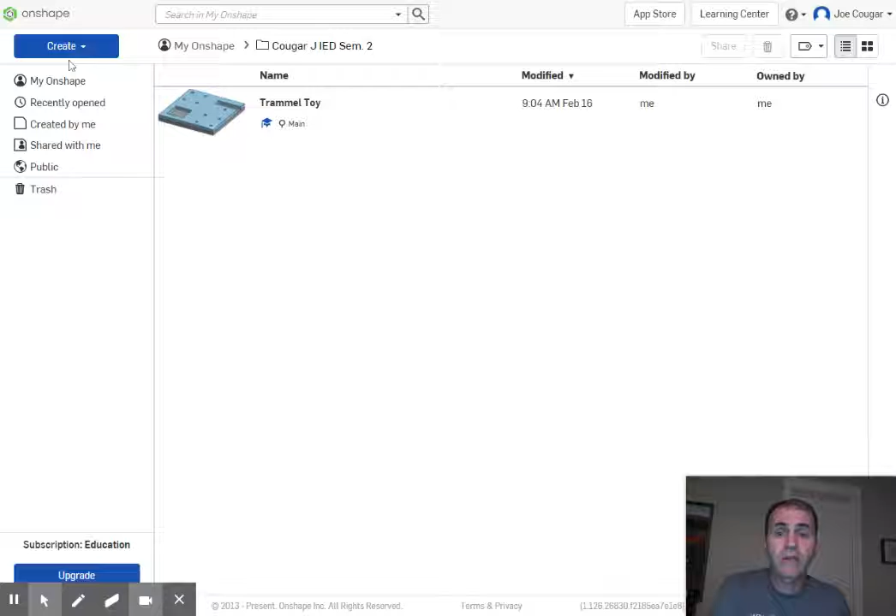Now you have your Trammel toy, and we're going to create a new document. We'll call this one Automata, A-U-T-O-M-A-T-A. Okay, so we've got a new document going in there.

Now here's the good news: most of this stuff is going to be pretty easy to build. It'll get a little different in the assembly, so we're going to build all of the part pieces for the box in one part studio.

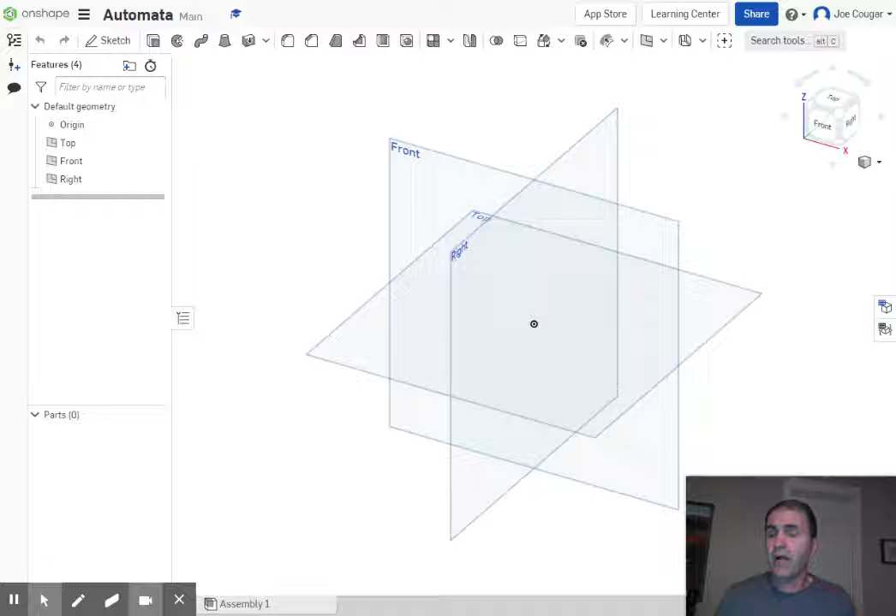So here we go. Let's go ahead and sketch on the top view. Doesn't really matter this time. I'm going to hit P to turn off planes, N to view normal, and we're going to make several rectangles that are going to be the pieces of this box.

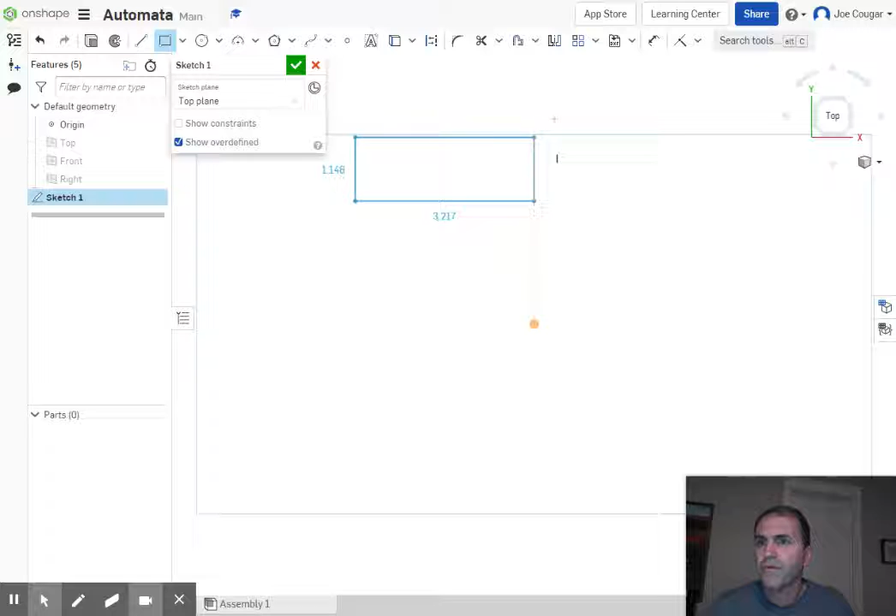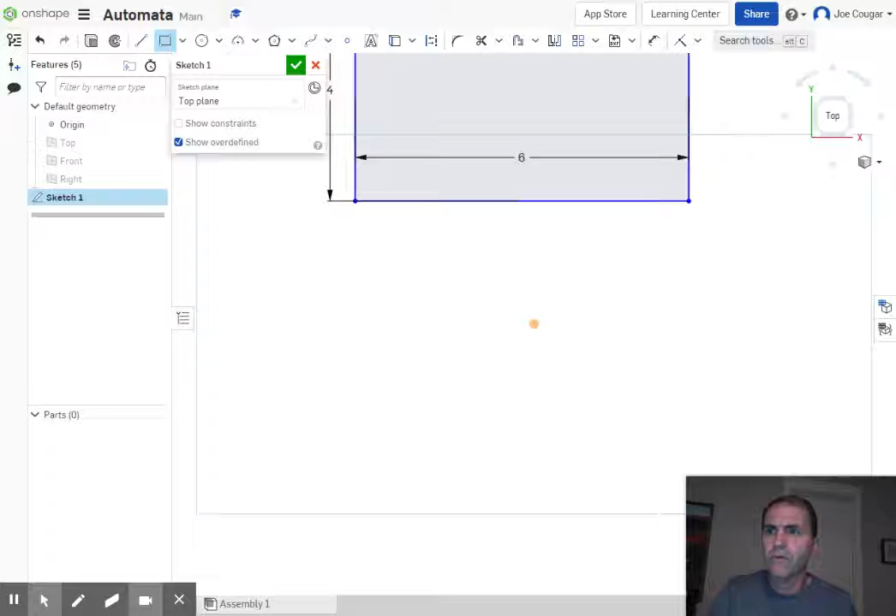So let's start with over here. You're just going to make them in random places. The first one is going to be 6 inches long and 4 inches tall. Okay, so a 6 by 4. That's going to be the back.

Now let's make another one nearby that is going to be 6 by 4.2. Because the thickness of this material is about 0.2, so I hope this will come clear in a little bit.

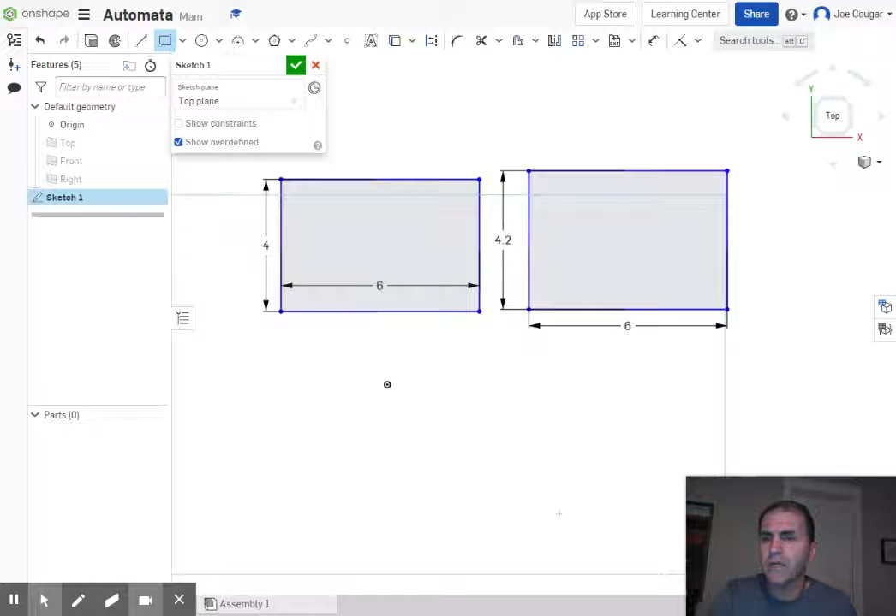We're going to make yet another one that is 6 and 4.2. One will be the top, one will be the bottom. And we're going to make one more random that is 4 by 4.

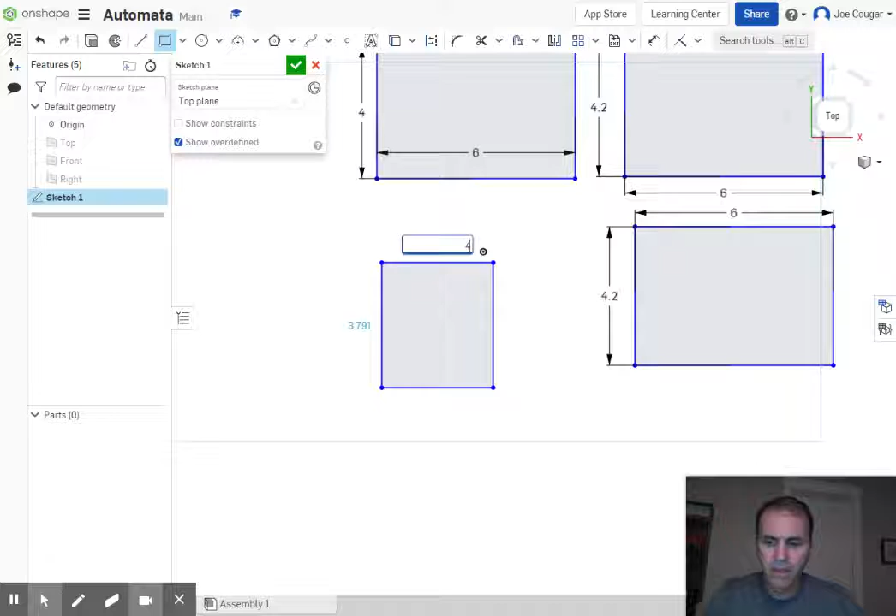All right, now in one of these, we're going to put a hole right here in the middle of this one. So hover over until you find some midpoints.

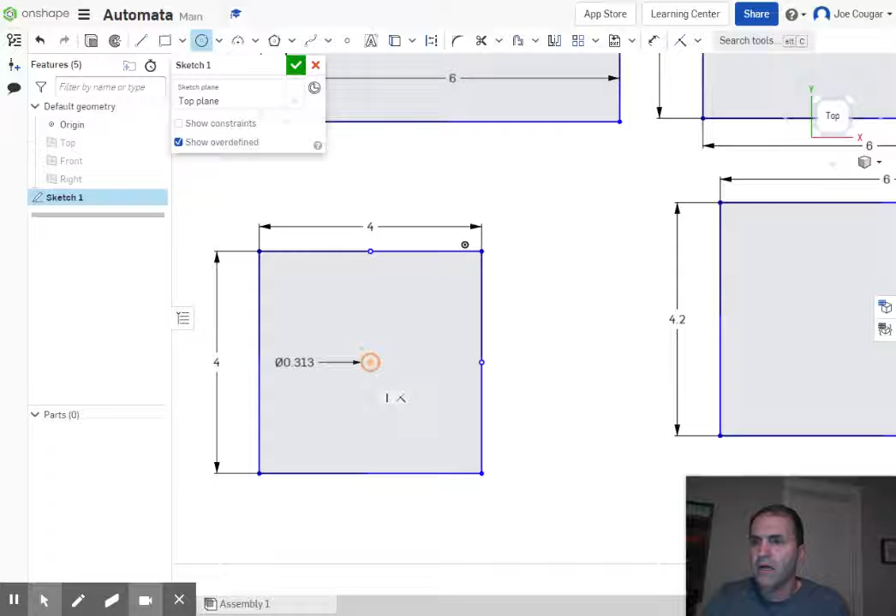Okay, and then we're going to click circle. We're going to hover around until we get right in the middle. See those two lines? Click, pull outward, and we're lined up. Click again, and we put in 5/16, 5 divided by 16, as the size of the hole. So there is our hole in the middle, which is now lined up in the middle.

So that's good, that's the sides. Now the top is going to need some 1/4 inch holes. We're going to line that up with the middle and come in about an inch or so. Click and pull, and we're going to make that also—no, I'm sorry, 1/4, 0.25.

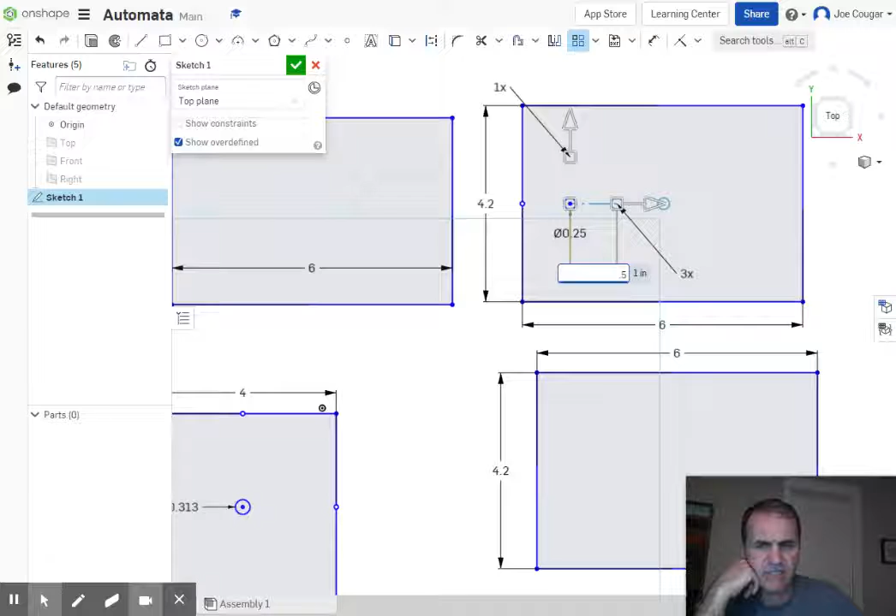And now we need to make a pattern out of that. I'm going to hit escape to get out of the command. I want to go up here to linear pattern, click on that circle, and right now the distance is 1. Let's try changing that to 0.5 and see what happens, and I need to have 6 total of them. Right now there's 3, I want 6. I have to double click on that, I want 6.

Okay, now it could have been bigger than 0.5, so let's go back and change that. Let's try 0.75, see how that looks. That's looking pretty good. Let's try just 0.8.

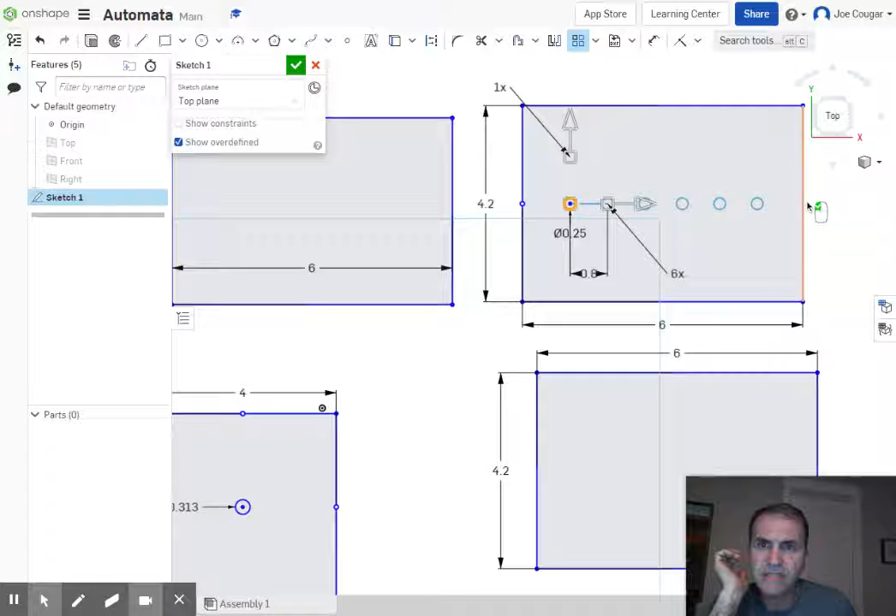I like that a little bit better. Okay, so it doesn't matter exactly where you started as long as we're about the same distance in from each side, and we have 6 total holes. And then we'll say, okay. Oops, I finished the sketch.

That's fine. Actually, no, it's not fine. Sorry, I want to go back into that. I'm going to double click sketch 1. I have one more thing that I want to make.

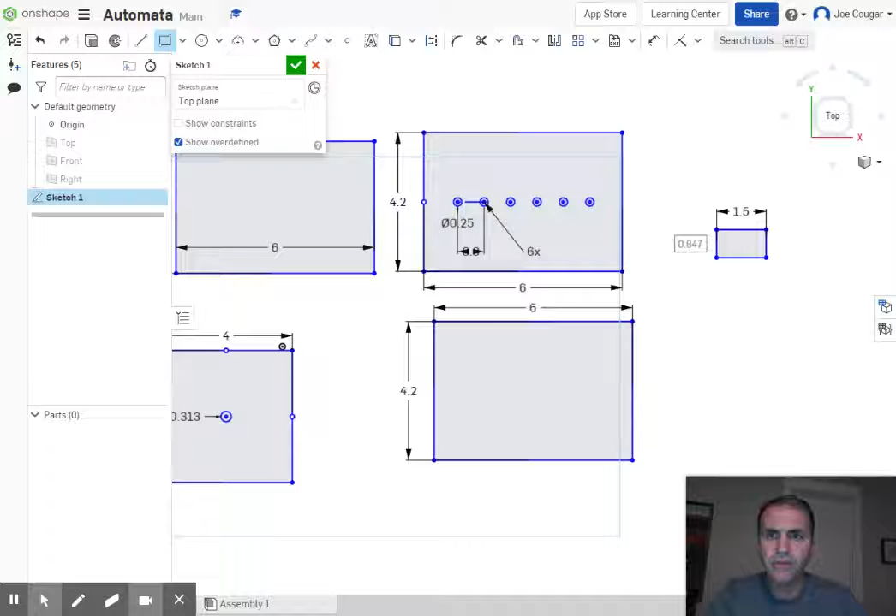And over here, we're going to make another rectangle here that is 1.5 inches long, 1.5, and 3/4 of an inch thick, 0.75.

All right, now this is going to have some holes in it also. This time I'm going to line up, and we're going to make a 5/16 inch hole over here. Whoops, I'm trying to make a rectangle. Let's try that again with a circle.

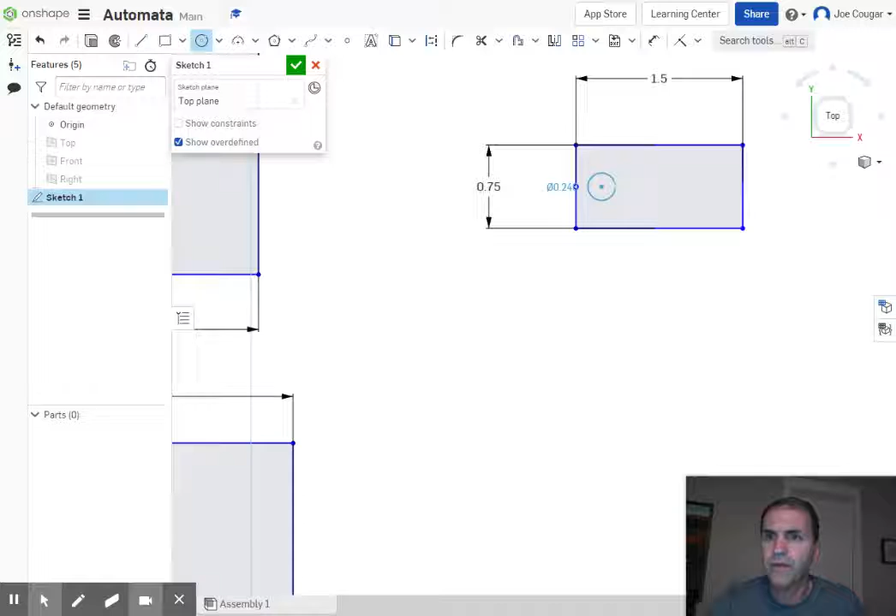Whoops, I accidentally clicked on there. Let's try that again, I meant to line up. Hovered over the center point, click 5/16, 5 divided by 16. And we're going to do another one lined up with the other side over here, also 5 divided by 16.

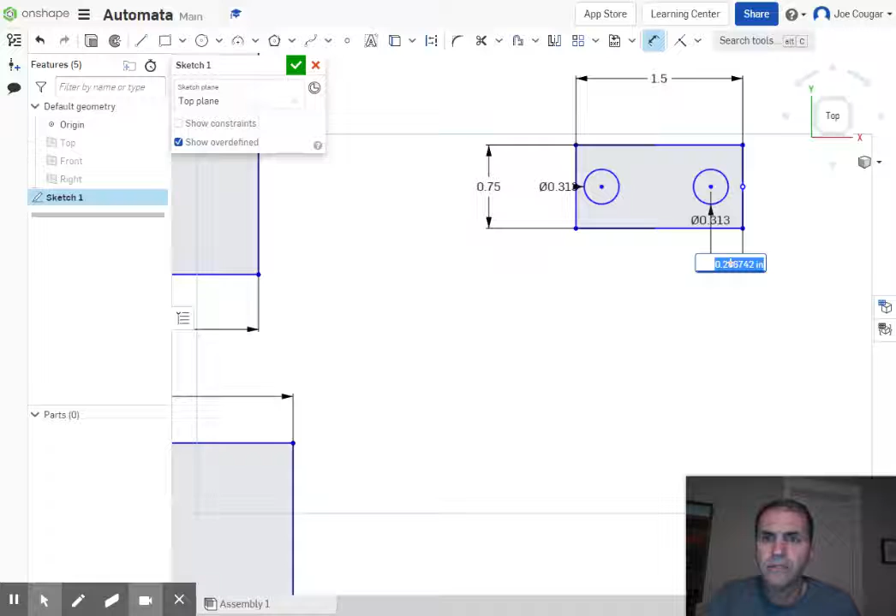And these two are going to be located using the dimension tool, a 1/4 inch from each end. So 0.25 from that end, and this one will be 0.25 from the other end.

Okay, good. Now I thought those should turn black because I lined them up. Oh, this whole thing can be anywhere though. So okay, we're all good.

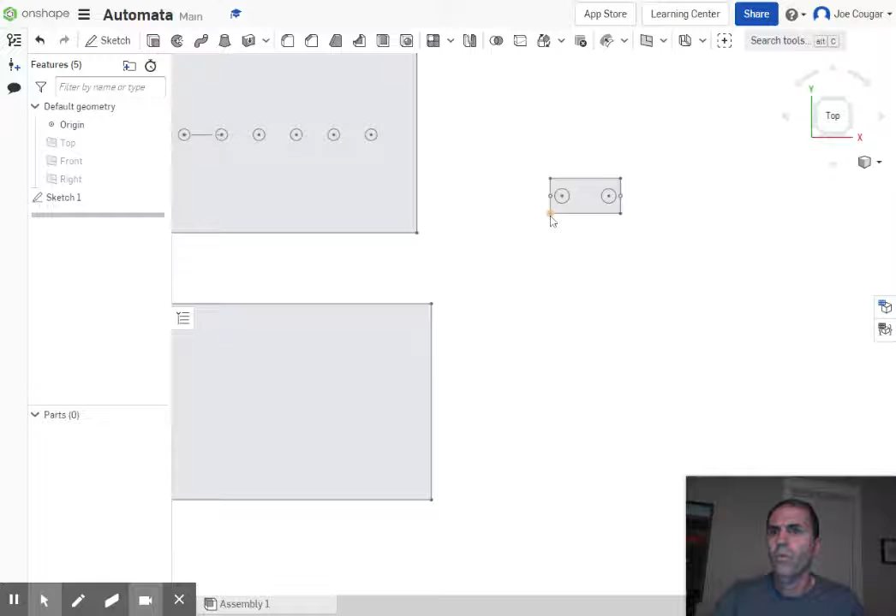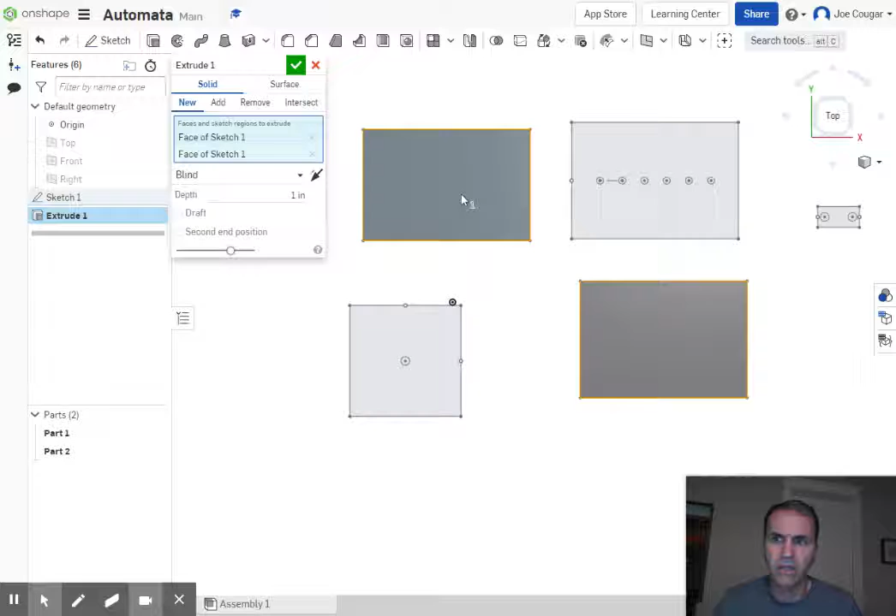Now we're going to use this sketch and do a whole bunch of different things. Extrusion number 1 is going to be the bottom. I guess this is the bottom because it's the 2 blank longer rectangles we're going to click, and the inside of this side, not including the hole, because we're going to leave that circle as a hole.

Now it's making 3 different parts, and that's okay. All right, but we're only going to go to a thickness of 0.2, which is about the actual thickness of the plywood. All right, now the sketch went away, and that's okay.

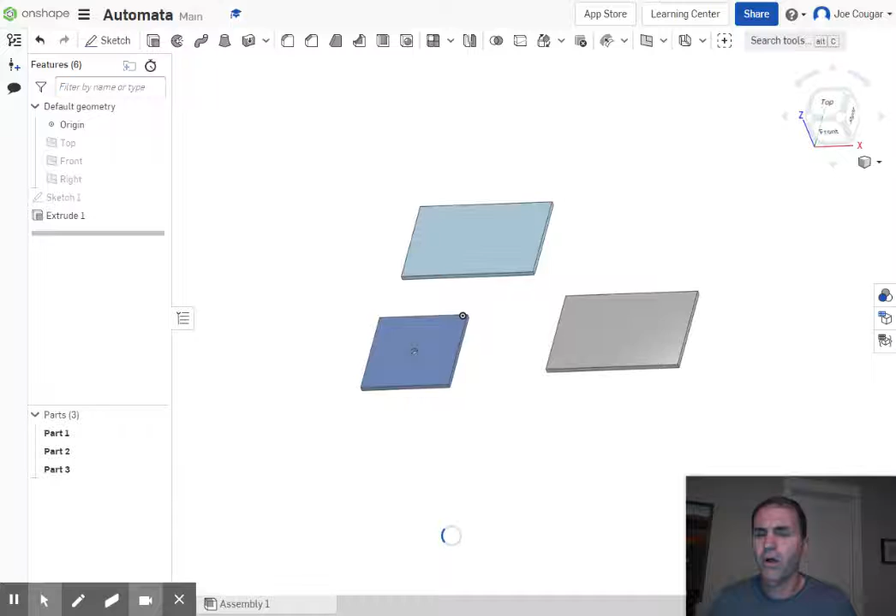Let's hover over here and see what's what. Okay, now I need to remember which is which here. So part 3, the one that's square, we're going to rename - right click, rename - call that side.

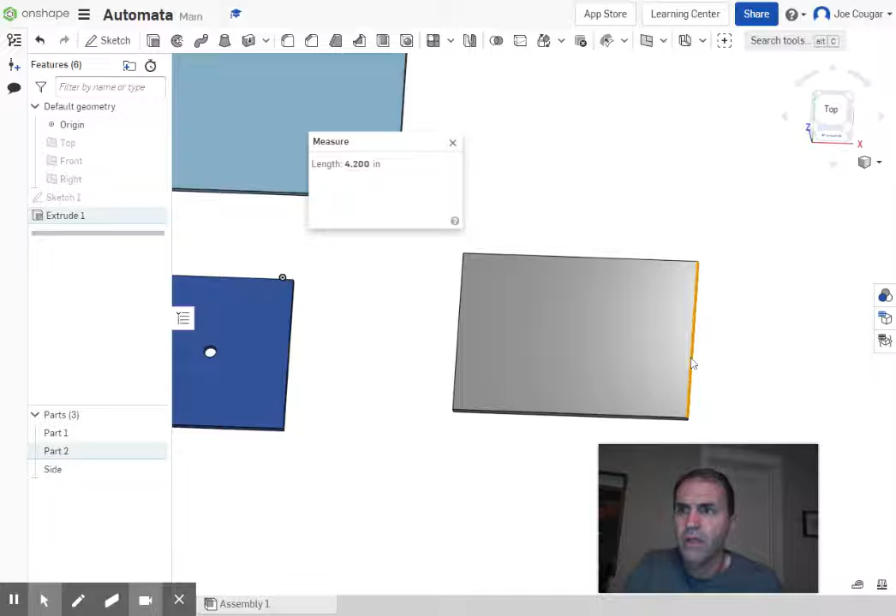Okay. Part, now we got to remember which is which. I'm going to move myself here. Whoops, come on, move. And use the measure tool because I don't remember now which one was the longer one. That was 4.2.

Okay, so this is the bottom. The one that's 4.2 is the bottom. Make sure you don't mix them up. So I'm going to rename that, call it bottom.

And that will leave this one that is, if we use the measure tool, it will only be 4 inches high. And we're going to call that the back.

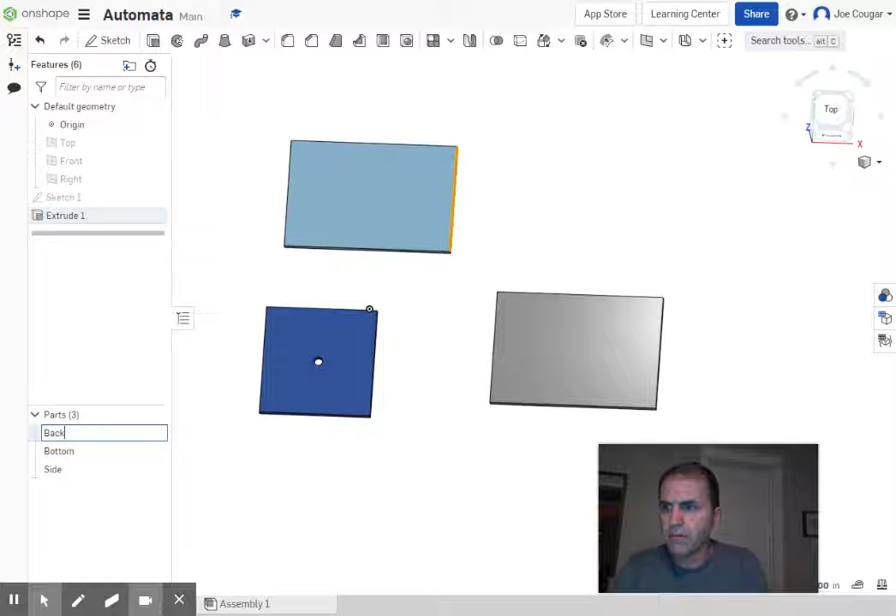Okay, now we're going to turn back on our sketch by turning on the visibility. Go to extrude. We're going to extrude not the holes, but everything around the holes. Now this one, this is the top.

The top is 0.5. It's a little thicker than the rest of the pieces are. Okay, and we're going to rename this as the top.

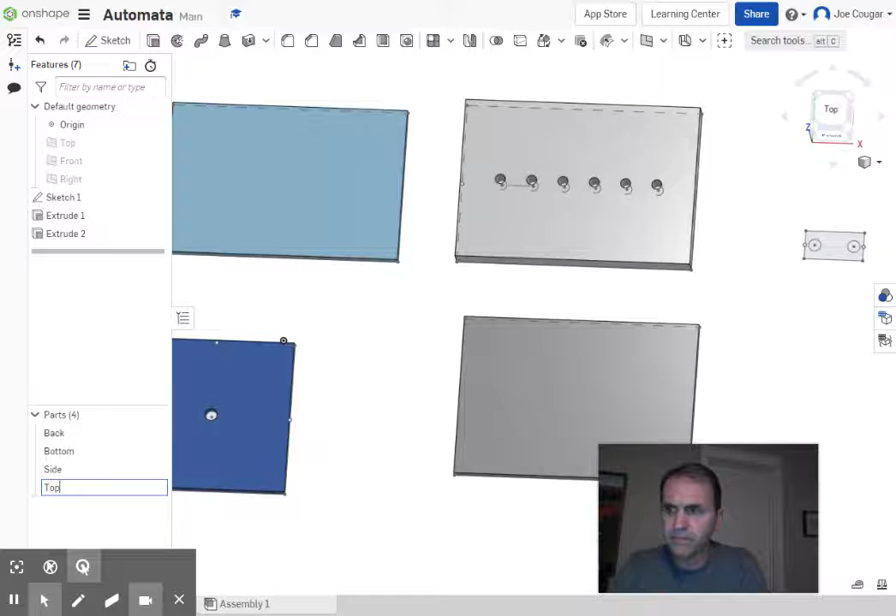All right, now you can leave them different sizes if you're different colors if you want, but I would prefer you make them look kind of like a box by editing the appearance. Oh, we can do this with all of them.

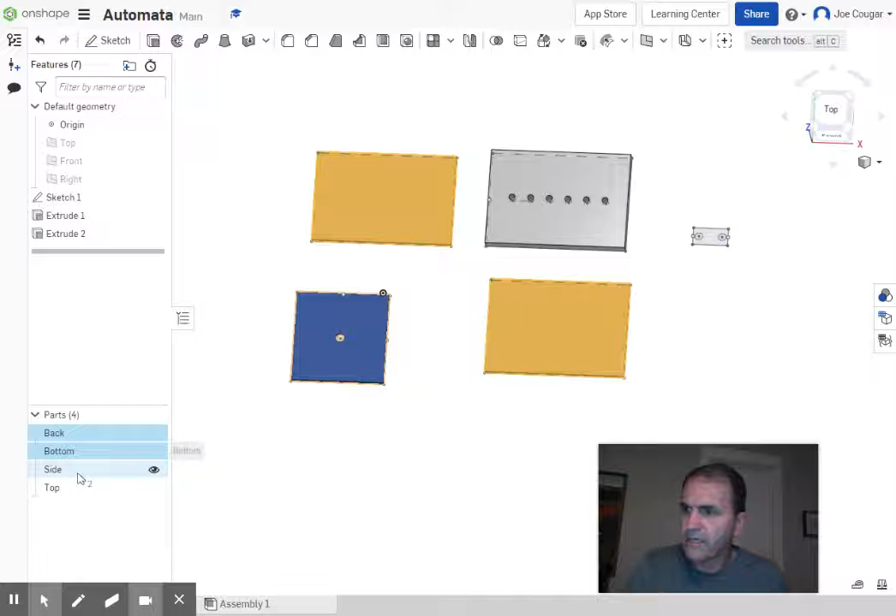I forgot, I can actually click on all 4 of those, right click, and edit the appearance. I just thought about this.

I'm not going to do that right now because I still have another part to make, that I am going to do all of them at the same time.

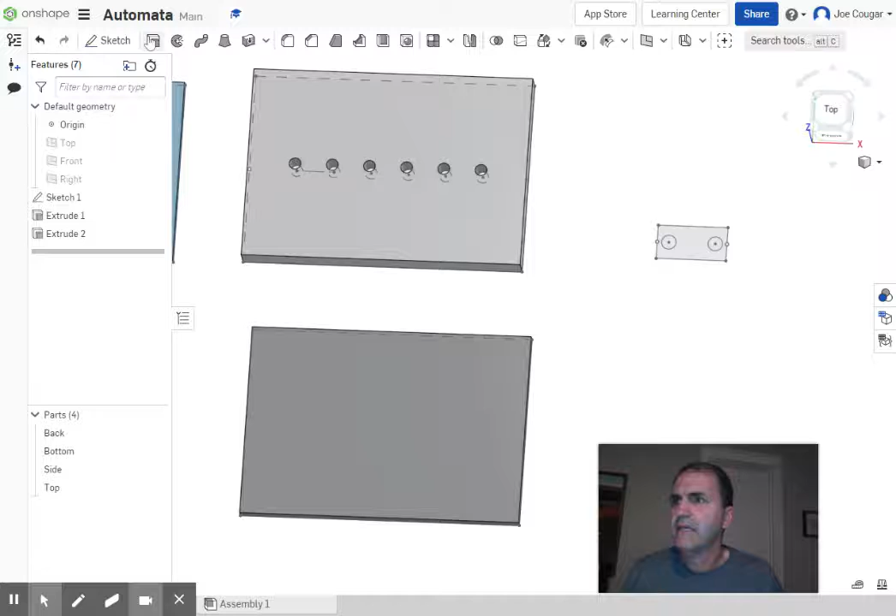All right, so let's take this last piece and extrude around the holes, and this one is going to be 3/4 of an inch, 0.75. All right.

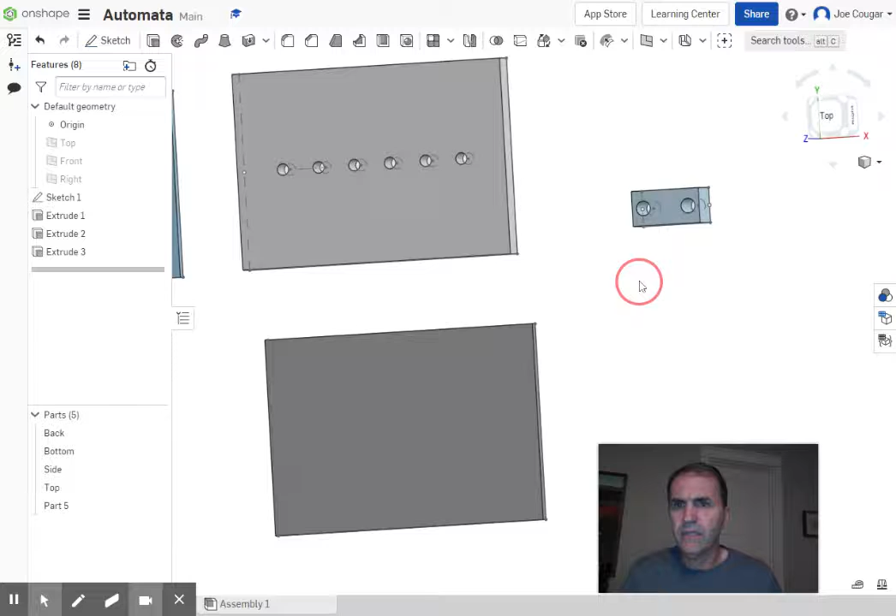And good. Now we still have the sketch on, you can see it. So this crank is going to do two different things. So I am going to extrude this one.

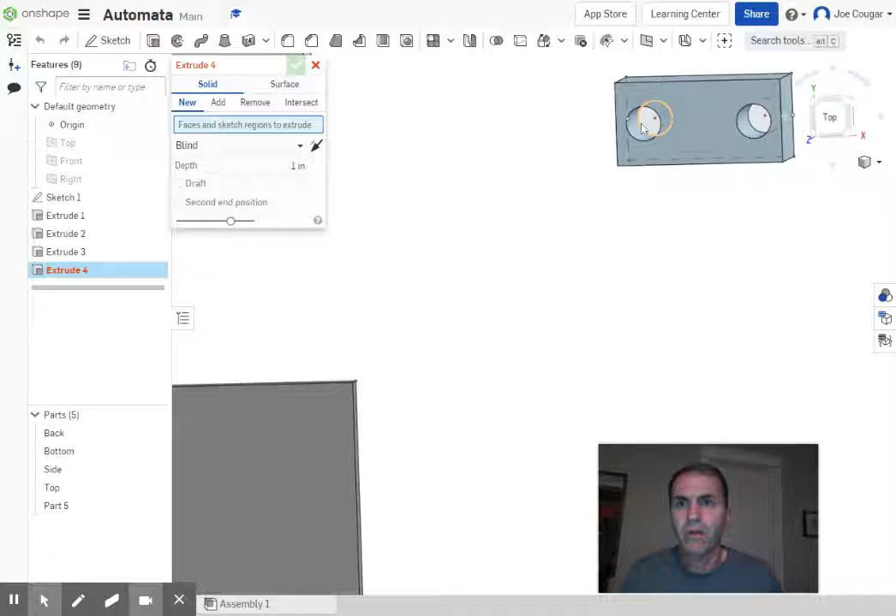I need that one down there in the bottom where the sketch is, not up here. I'm not extruding this, I'm extruding that. It's going to come out, and this is going to be the crank, the handle on this little crank here.

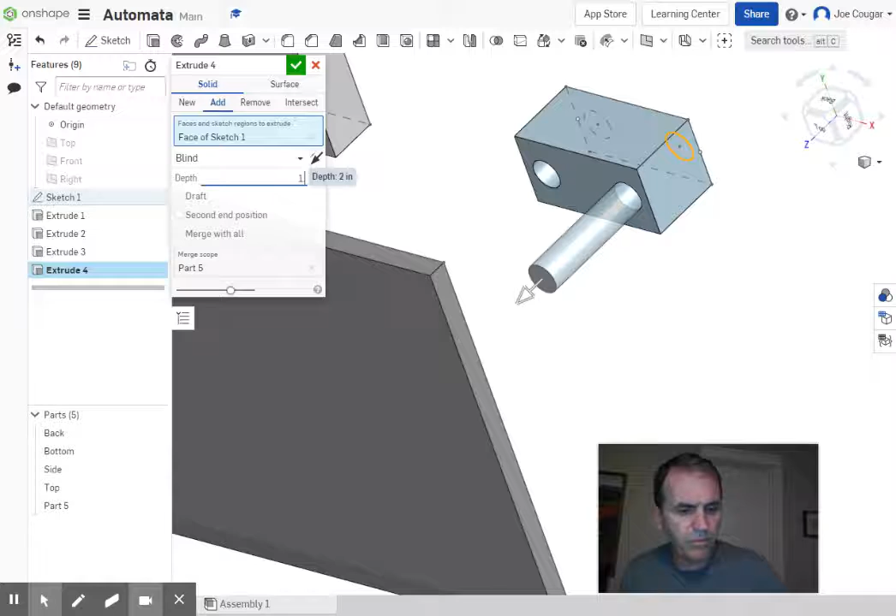Let's try 2 inches and see what it looks like. That's a little too much. Let's try 1.5. Yeah, that's about right.

Okay, now we're going to do another extrusion. By the way, if I go to this last extrude, it should say add, because I want it to be part of this same part.

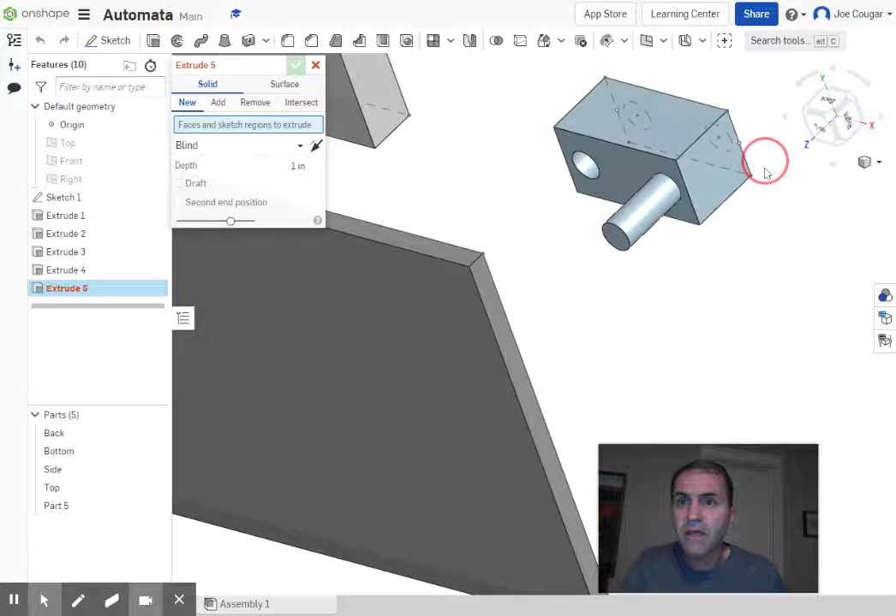Good. Now we're going to extrude, do 2 more extrusions. This other one is going to go 2 different ways. We're going to go out, but only 0.75, and make it just match. Notice that it kind of closed that up as if it's not even there anymore. And then we're going to go the other direction.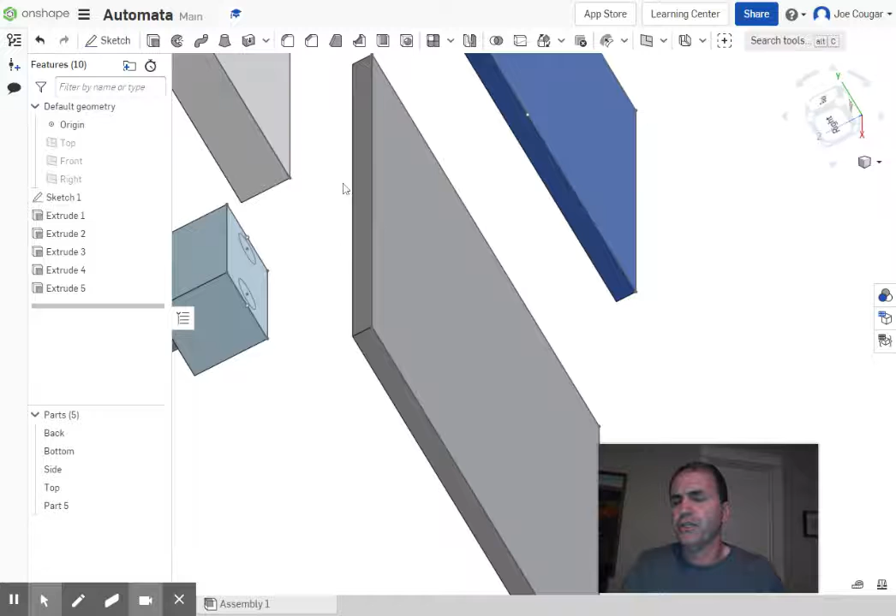Extrude, and we're going to go from... sorry guys, let's flip this around so you can see a little better. So we're going to go the opposite side, that circle. Now I want to flip the direction because I want to go the other way, and I want it to go all the way through the box.

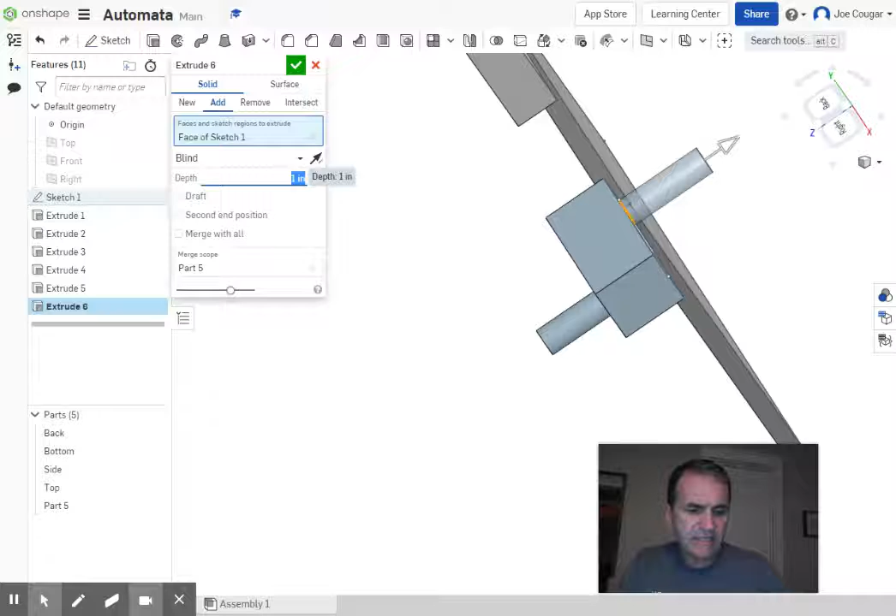Let's just make it 7 inches long. It'll protrude out the other end of the box, and again we're adding it. That's fine because the real crank does go all the way through the box and pokes out the other side a little bit also.

All right, so now we're going to take all of these parts. Let's rename the part we just made as crank.

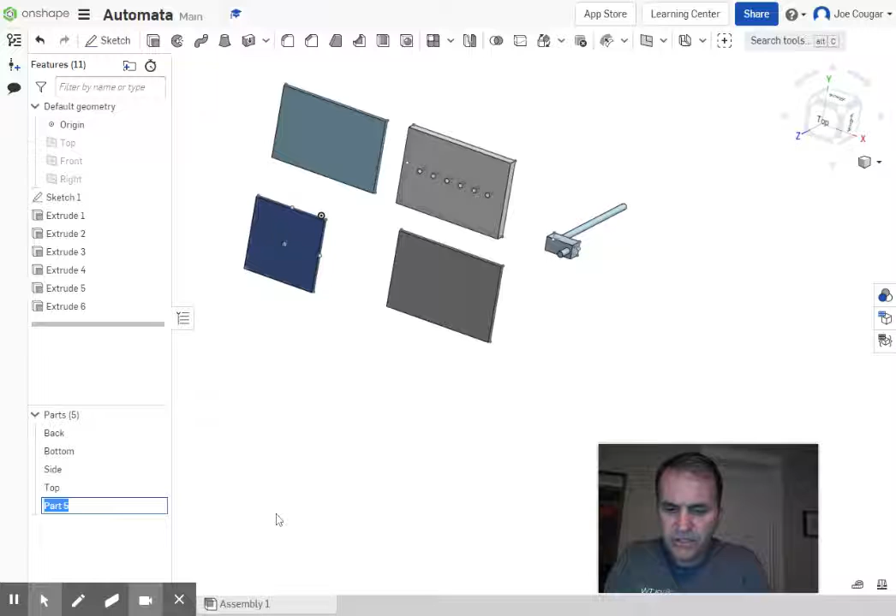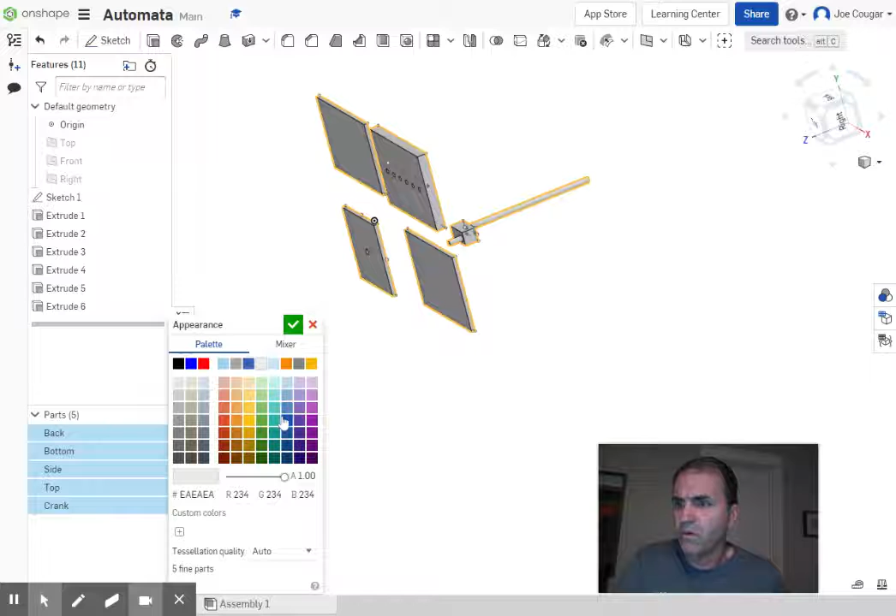Now we're going to click on all of these parts down here. Say edit appearance for these 5 parts, and make something that looks like wood-ish colors to you, kind of like that one. Again, you don't have to - you can make it a different color if you want, but let's make them wood-ish. And I'm going to finally turn off sketch 1.

And now I've got these parts, and they're all there in this one part studio. Now I'm going to do one more.

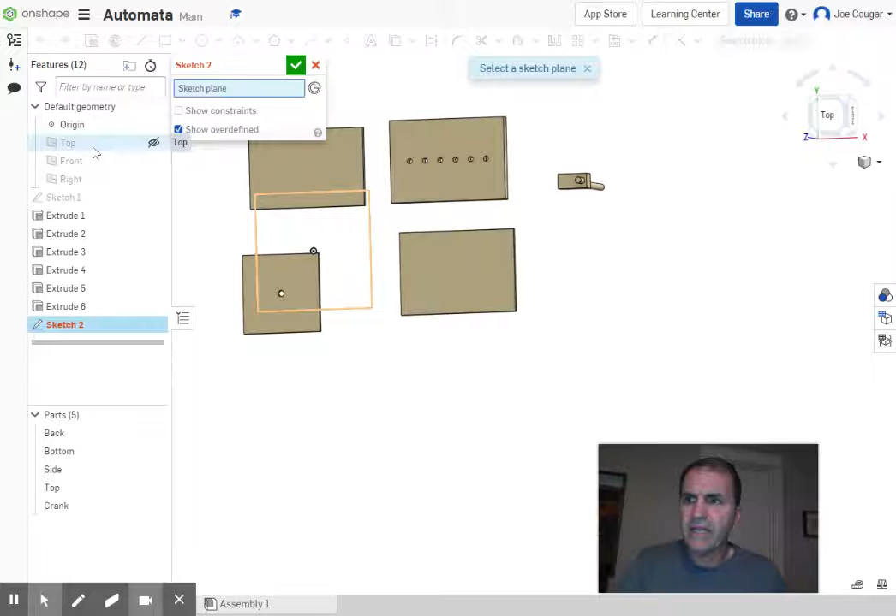And we're going to sketch. It says, what sketch plane do I want? I can bring them all back. It doesn't matter really which one you choose. We sketched on the top before, so let's go ahead and do that again. Sketch on the top, N for normal.

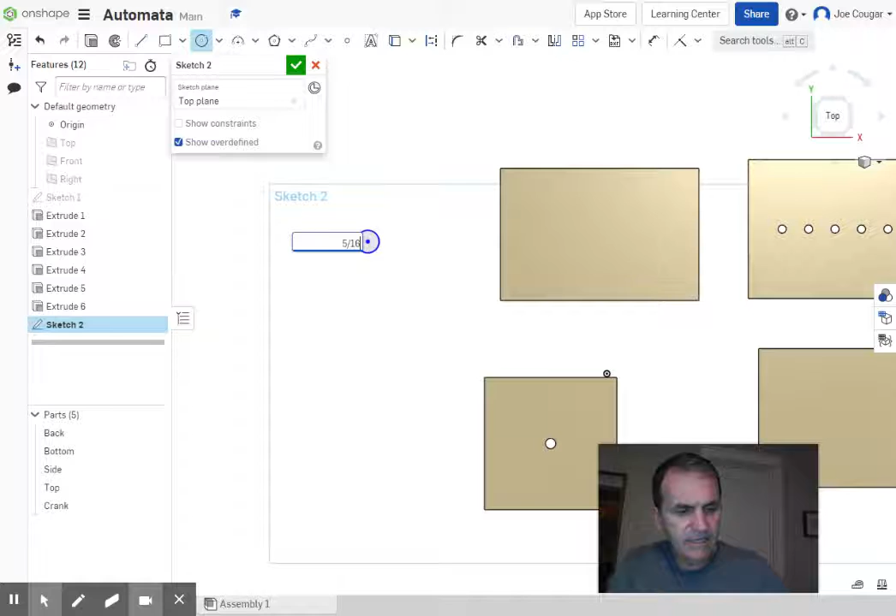And anywhere you want, we're going to make a washer. So it's just 2 circles. Click - the first one is going to be 5/16, enter. And there's going to be another one that is concentric to that, so you're clicking on the same center point and dragging out. It's going to look about like that. Let's make that one 0.75, enter. Okay, finish your sketch.

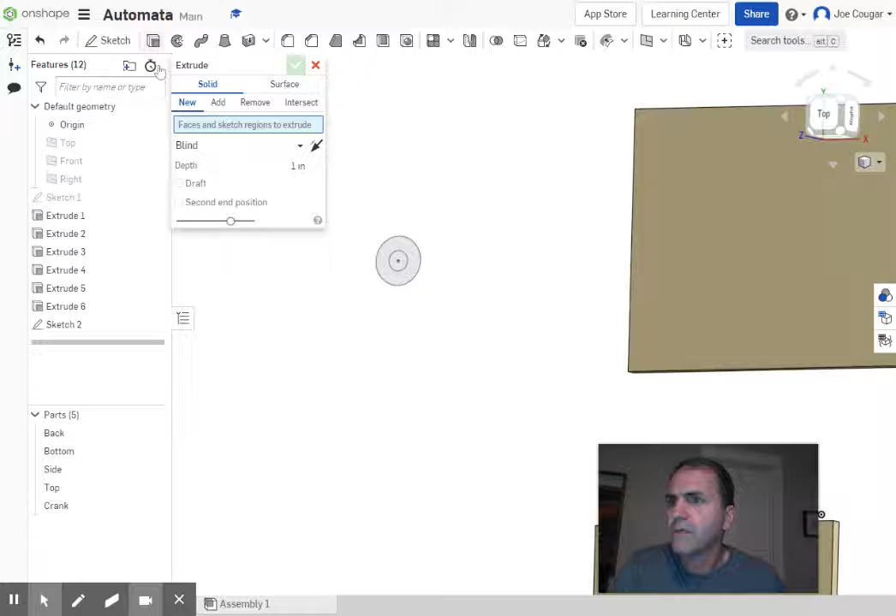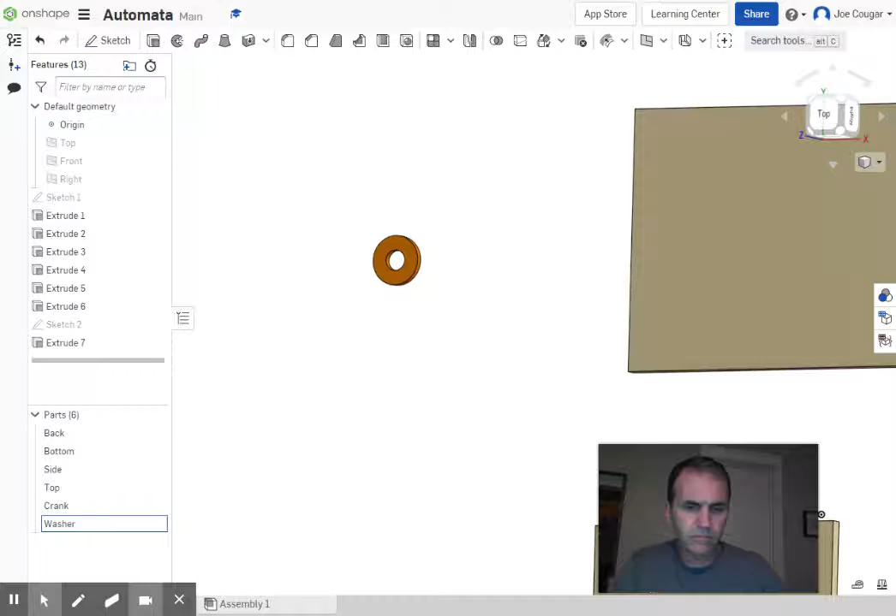We're going to now extrude the donut part, the washer, and let's just make it 0.1 - a little more than a 1/16 of an inch thick. We're going to call that part, rename washer. You can leave it whatever color you want, but I'm going to try and make this authentic and make it look kind of like a washer.

All right, very good. We've got our box parts. Now we're ready to start putting it together.

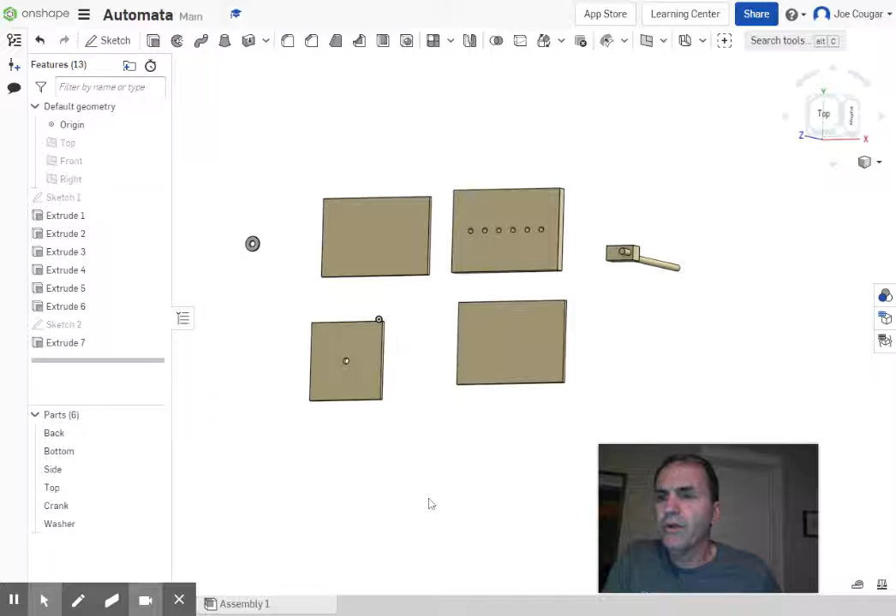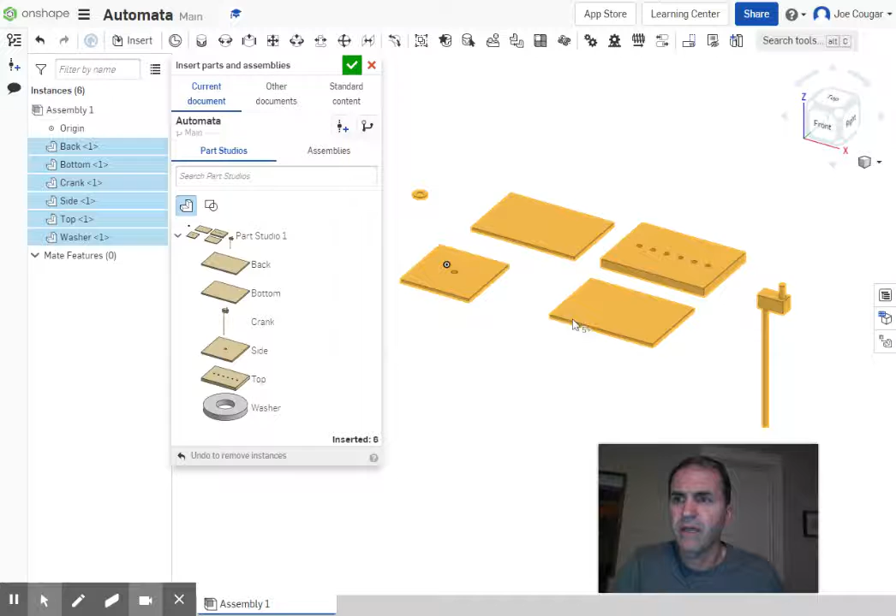All right, so here we go. We're going to put this thing together, and this is actually pretty easy to do. You're going to go to your assembly down here, which already should be there, and we're going to insert Part Studio 1, which is going to give us all of those same pieces that we had. Then we also need to click one more side and one more washer.

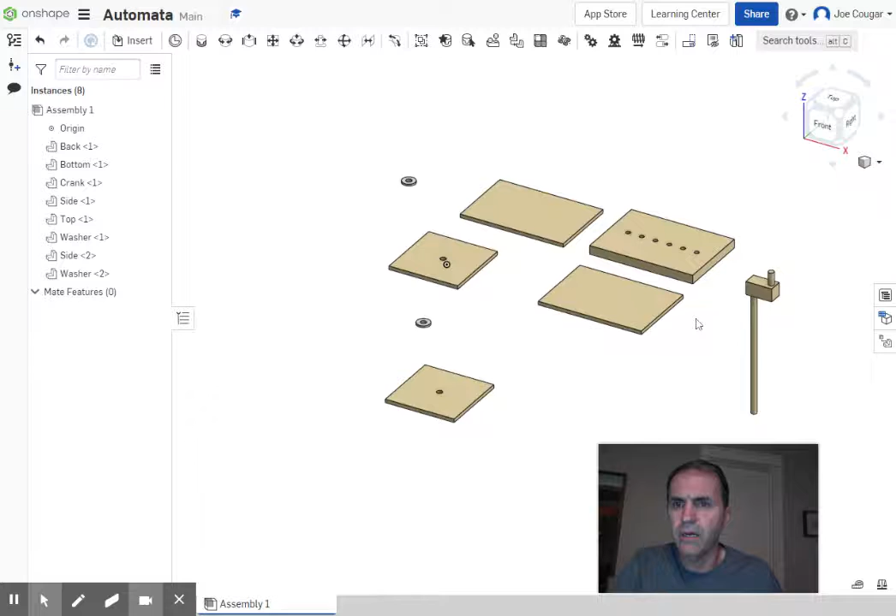All right, so we've got all our pieces. Now we need to figure out which one the bottom is, that one. We're going to put those. Now I know that's weird that the top is thicker than the bottom, but there's a reason for that we'll talk about later. Just like when we build the actual automata, the way this goes together is important. So we're going to take the bottom and attach the back to the bottom.

Now, it's been a while since we've done assemblies, so I want to remind you of how these things work. So we're going to do a fastened mate.

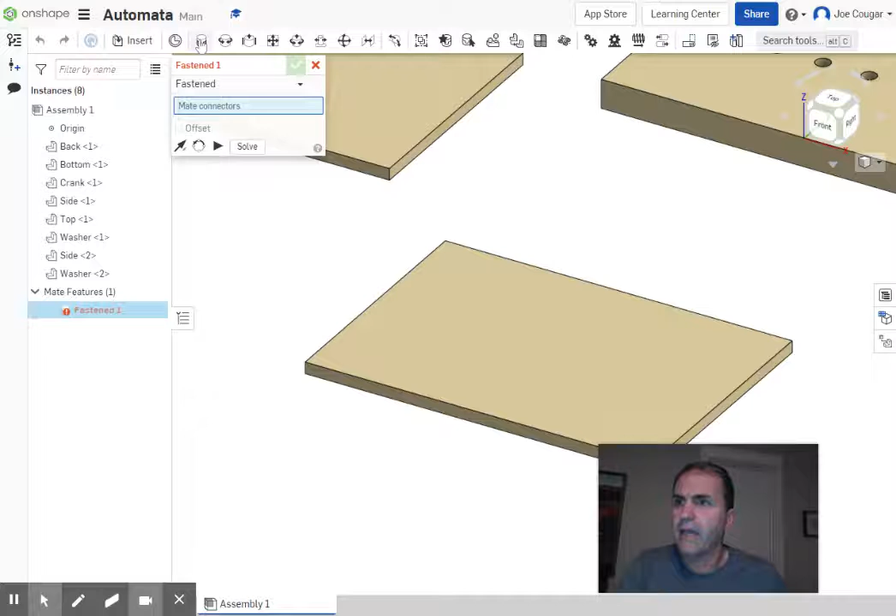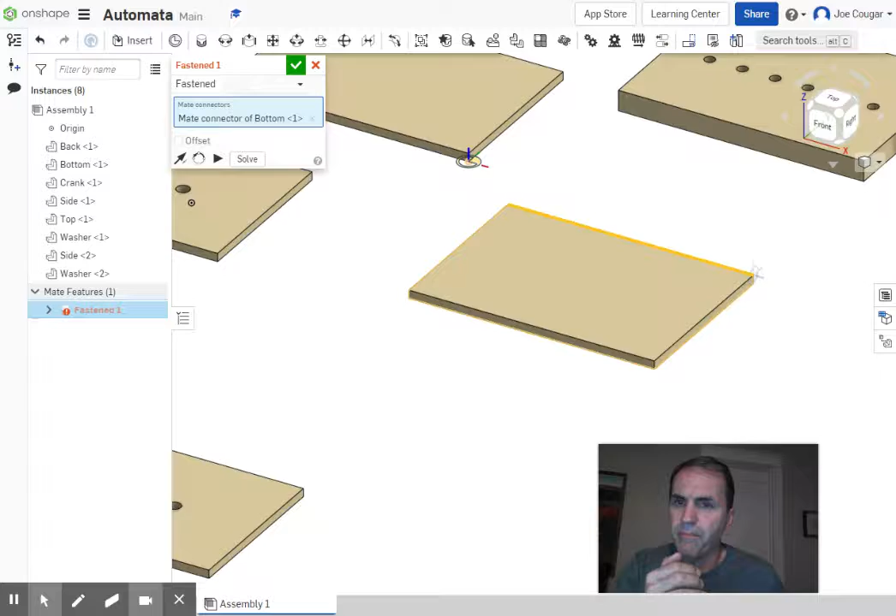It's important that you're zooming in and out. We're going to choose the top back corner. You have to make sure that blue line sticks the way you want it to go, both in this one and the other one. Click there, and now I'm going to go to this corner. I have to think about where the corners are going to line up, and it's going to be right there. Notice that it doesn't go the way I want it to; I need it to flip around.

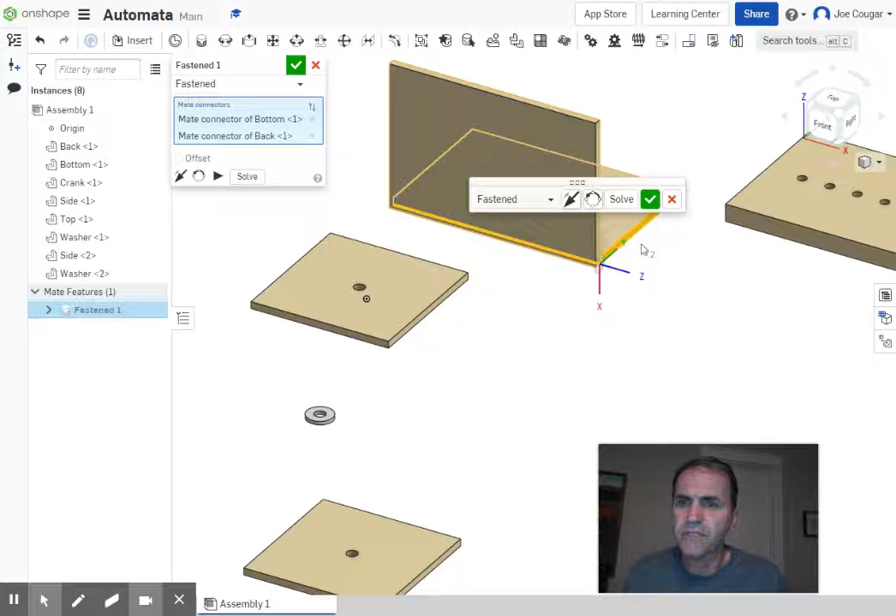I just realized I should have fixed the bottom in place first. I'll click check and see if it looks right. Now it moved the bottom away on me. I'm going to undo that and redo it, fixing the bottom in place so it doesn't move around. This time, before I get started, I'll fix the bottom in place. Go over to the bottom, right click, and say fix. That way it's not going to move; everything else will, but it won't.

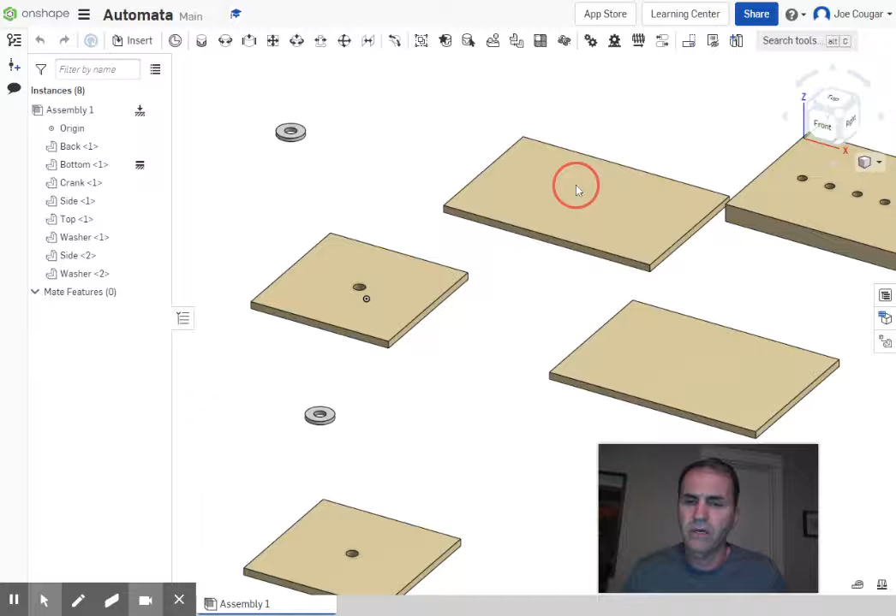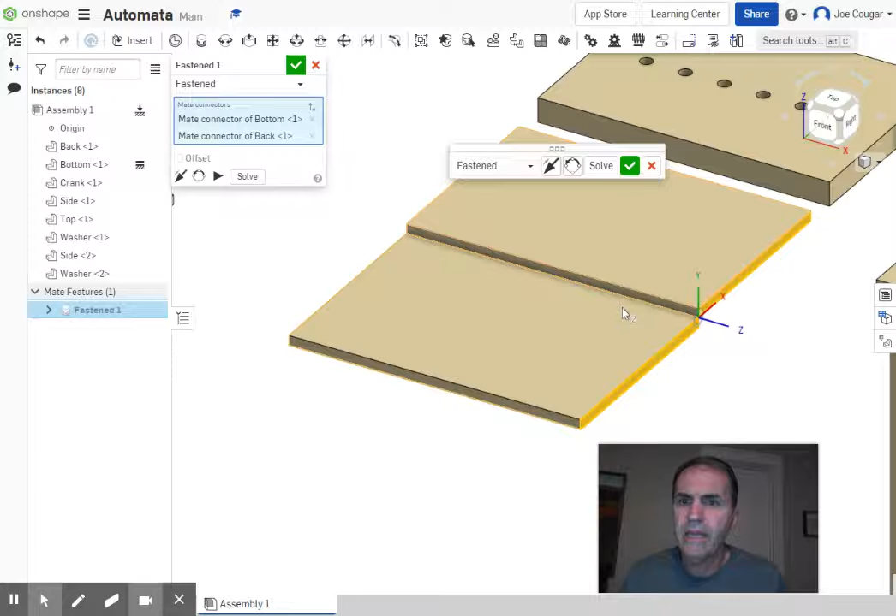Let's do that again. Zoom way in, fasten mate, make sure that blue line faces the way I want it to go. Same way over here - see, it's facing the wrong way. Now it's facing the right way, but notice it's flat, I need to flip it. Wrong way, wrong way - there's the right way, I think, although it might be flipping the bottom around. Nope, we got it that time.

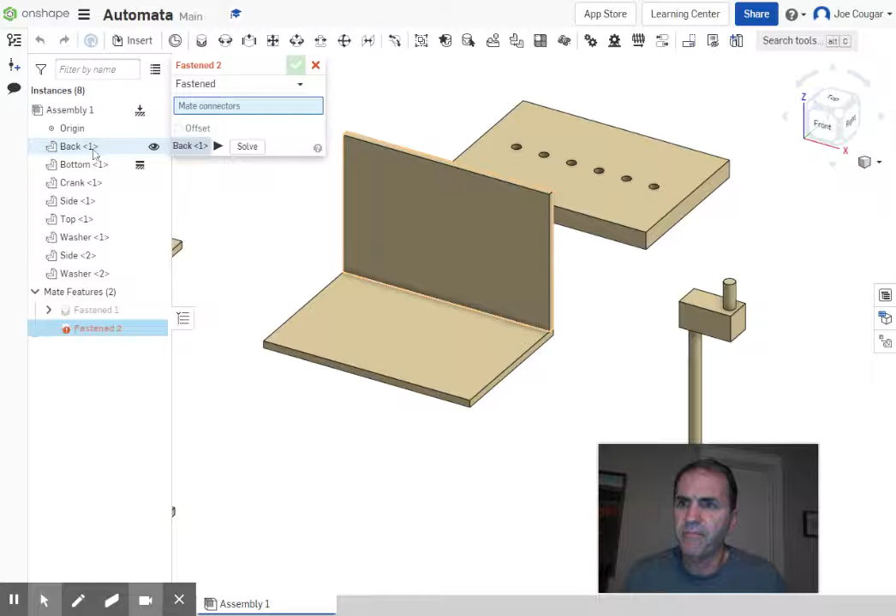So this should be the bottom. You might have to try that a couple times, and I've got the back sitting on top of it. That's good. Now the sides are going to be on either side, fitting kind of inside this L shape, so we'll do that one next.

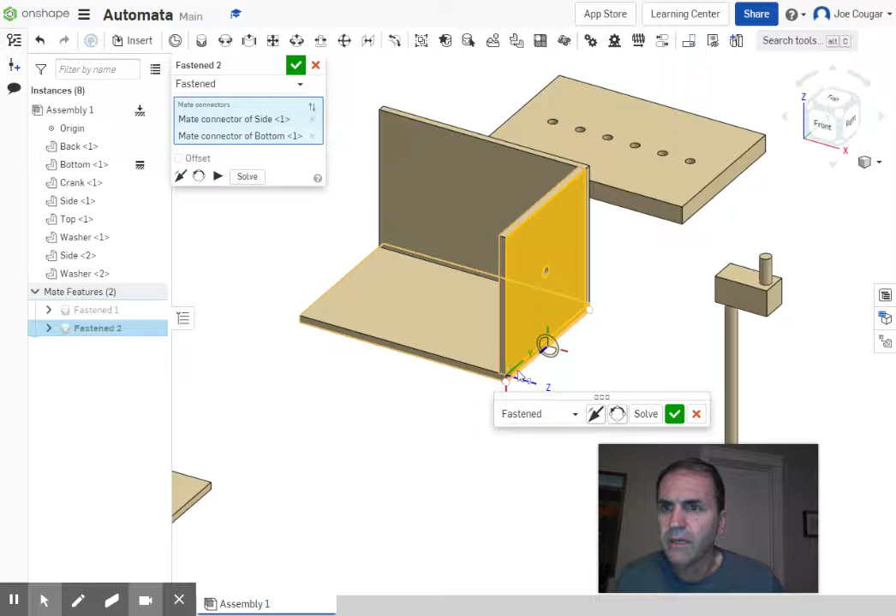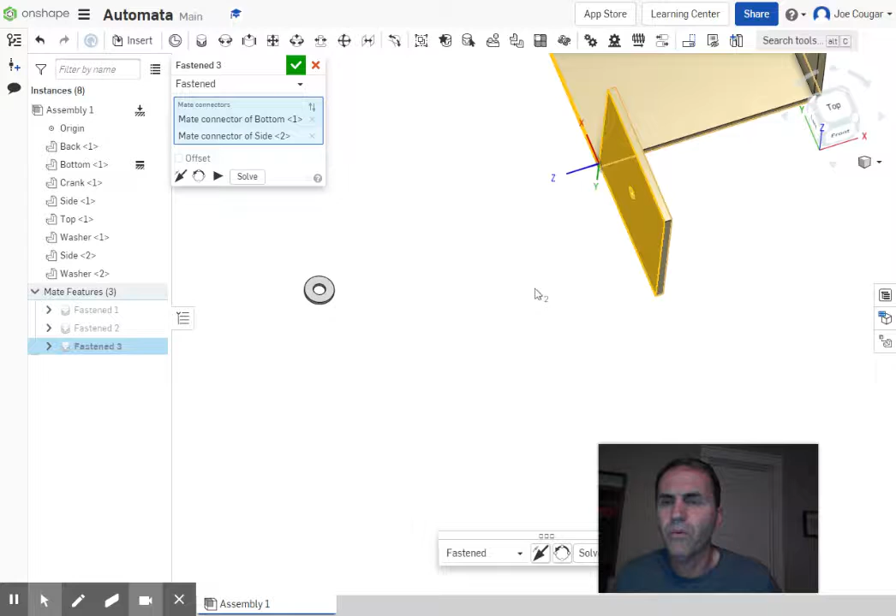I'm going to choose there, and I'm going to choose here. You have to just kind of learn how these mates work. Good, now let's do the other side. This time I'm going to flip around, choose here and here, click - should be where I want it to be. Whoops, nope, it's not right, so I got to flip my direction. Nope, that's not what I wanted to do. I got to flip my axis. There we go, let's make sure it's in the right place. Good, all right, so I've got my two sides.

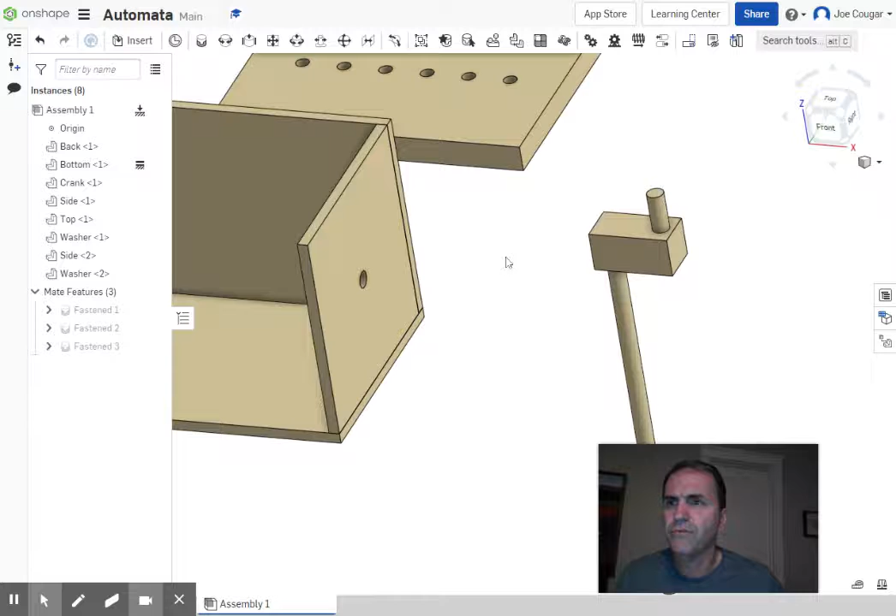I've got the next one, which is my top. I think I'll do that by matching the front to the front. That one and that one. Did I get that right? I believe so. All right, and we've got our box.

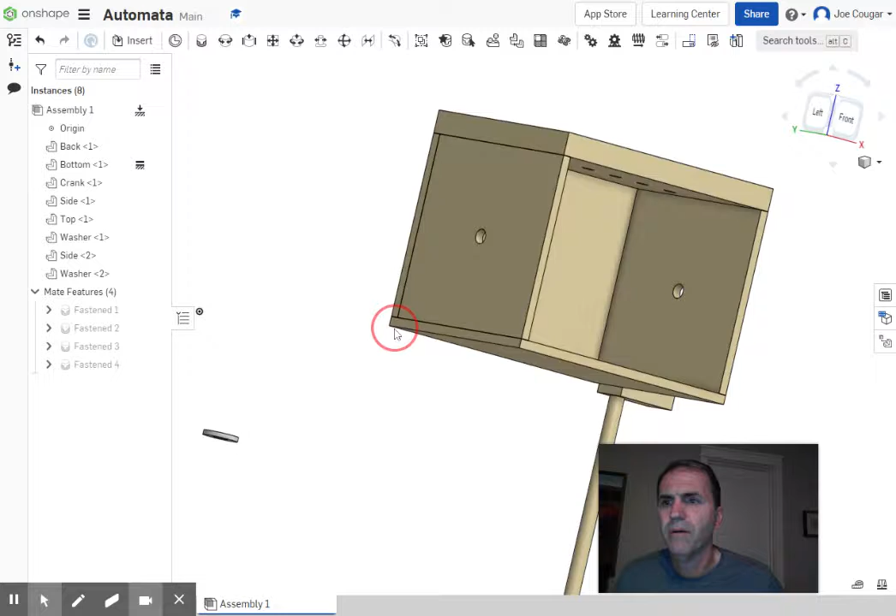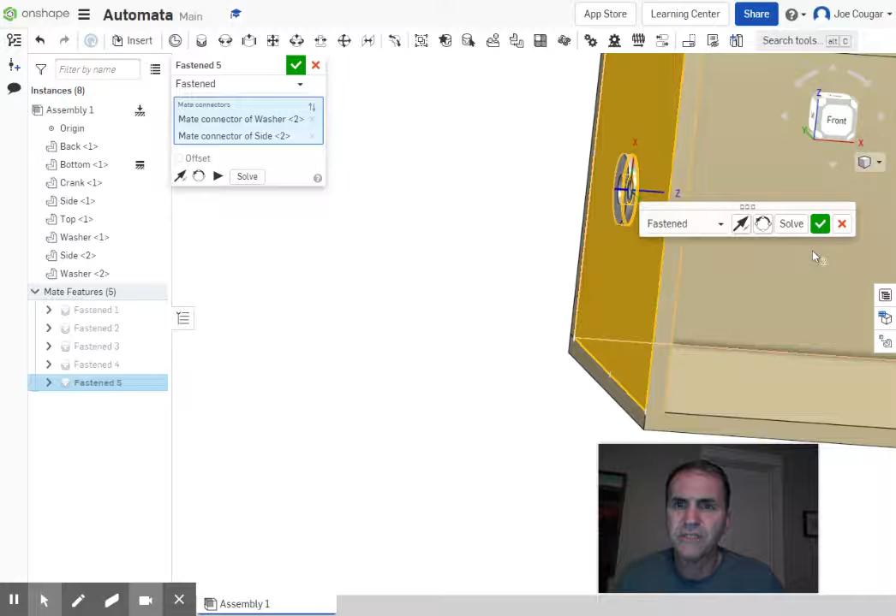Now the washers are going to go on the outside. When you guys physically make these, you'll learn that the washers help things spin a little bit. So I want that attached to that. Now, is that going? I can tell it's going inside - whoops, so I'm going to flip my direction so it sticks to the outside. Good. And the other washer, wherever it is - it's way over there - is going to be fastened there. When you're doing assemblies, you got to learn how to zoom in and out, and it's still flipped the wrong way, sticking out.

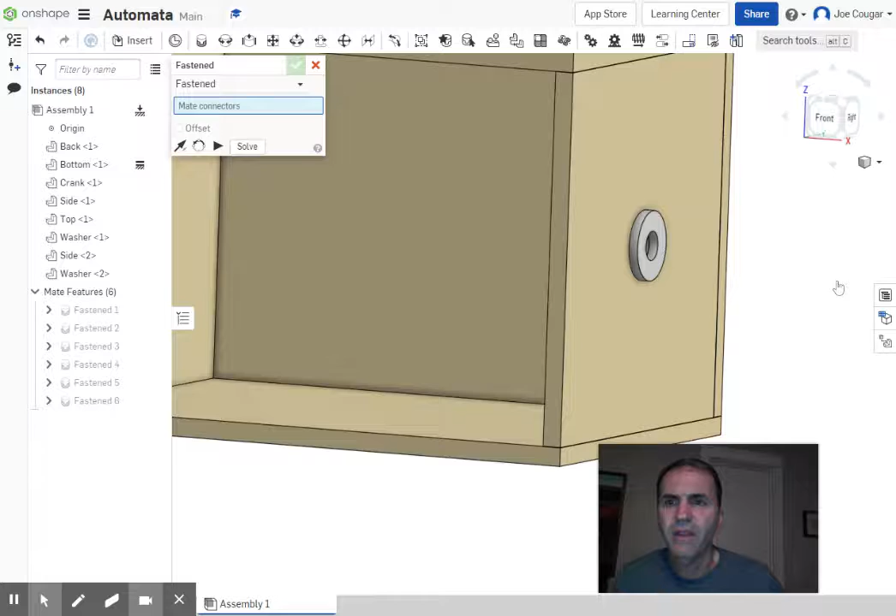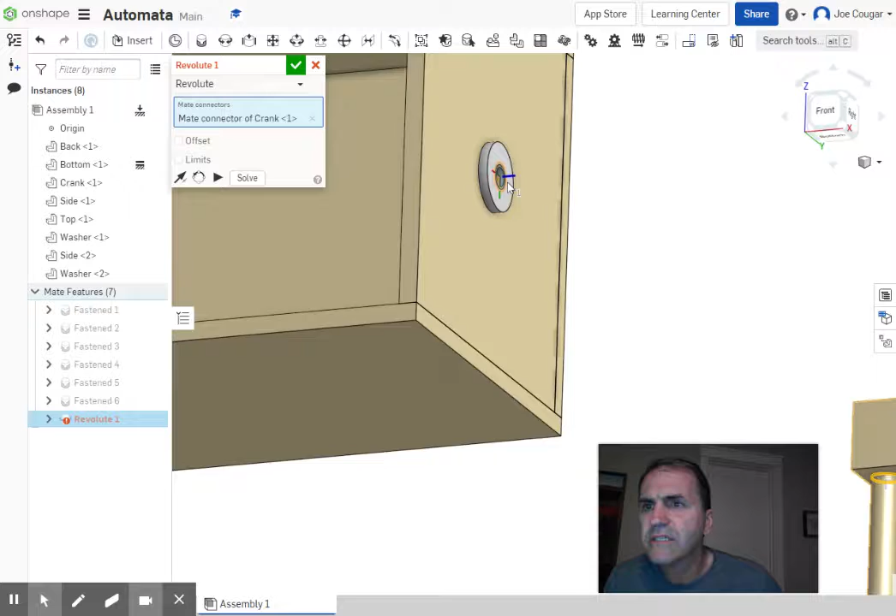There we go. And finally, the last one is going to be a revolute mate, not a fastened one, because I want the crank to spin. Let's do the revolute mate. We're going to find that circle right there and attach it to the outside of this washer. Oops, got to flip it around if it's not going the right way - and good. I should now be able to take this, grab it, and spin it around - and I can.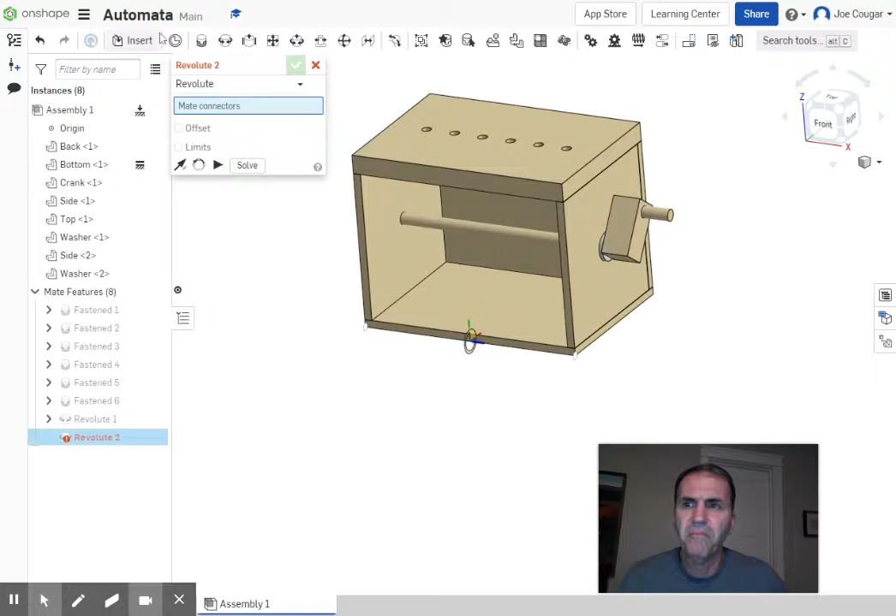All right, good enough for this time. We will talk about cams and motion and all that stuff soon, on the next one I think, or whenever we get done talking about cams. All right guys, looking good, we'll see you next time.